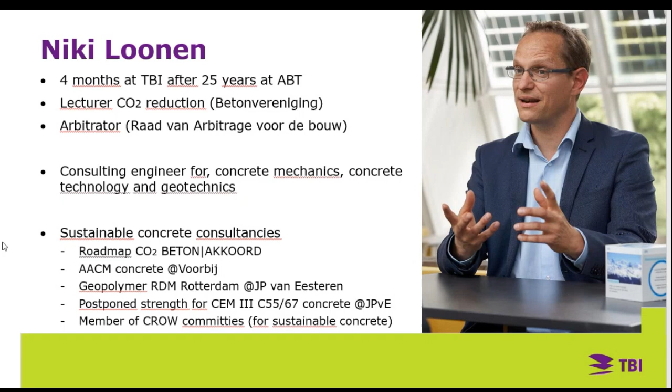My goal is to develop zero impact concrete. I want to use as much secondary materials as possible, and I want carbon emissions to be zero, possibly even negative for concrete. I think that's possible. Last year in December, we made our first cube in the concrete factory in Amsterdam, which was CO2 neutral, with a lot of technology and secondary materials, some of which I'll also discuss in this presentation.

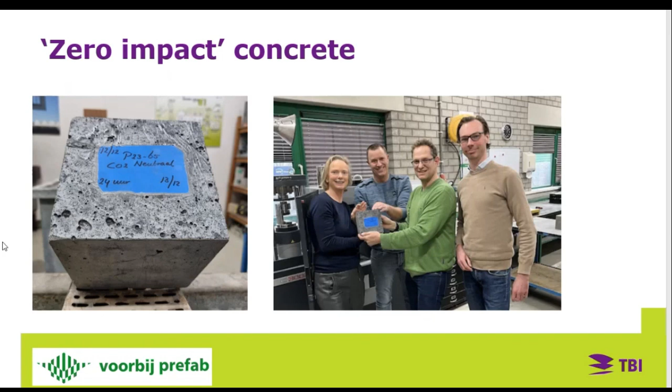The Dutch concrete, how circular is it at the moment? It's not so circular, because most crushed concrete currently ends under roads, pavements, or even warehouse slabs. The problem in the Netherlands is we don't have rock, so we need to find our stone somewhere else, and demolished buildings are obviously a good source. But it's a pity that we put concrete in there, because it's much better used another way. It's more like downcycling at the moment, and we want to recycle the concrete into new concrete. That's one of the goals of the Concrete Accord.

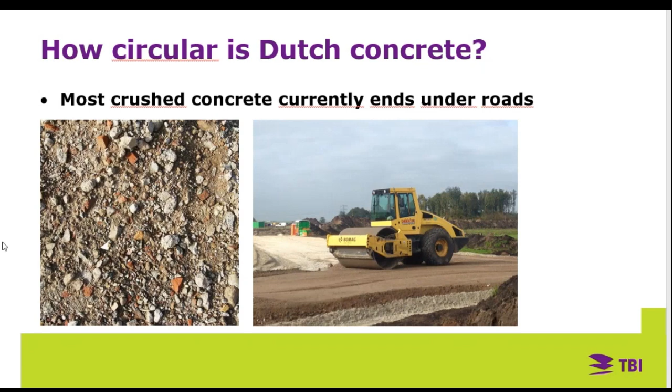This is something we are planning to change. The Dutch highway authorities, for example, are looking into reducing the amount of concrete in blended material, and even going to zero concrete in road foundations in the future. So that's where most of our crushed concrete is going now, and that needs to change, in my opinion.

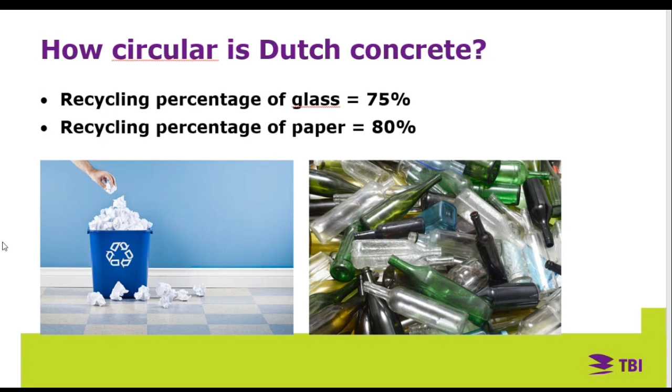For comparison, if we look at glass or paper, the recycling percentages are 75 to 80%. It should be possible to do that for concrete too, because almost all concrete is professionally demolished. It would be even easier to do that when professionals are working on it than when it's only the public sector.

To crunch the numbers: in the Netherlands we use 12.5 million cubic meters of concrete per year. We need 24 megatons of sand and aggregates per year, and we demolish 12 megatons of concrete per year. So potentially we could reach 50%, but currently we are at only 10% recycling of crushed concrete. We need to go from 10% to 100%, and then we could replace 50% of the sand and aggregates that we use. So we have a big step to make still.

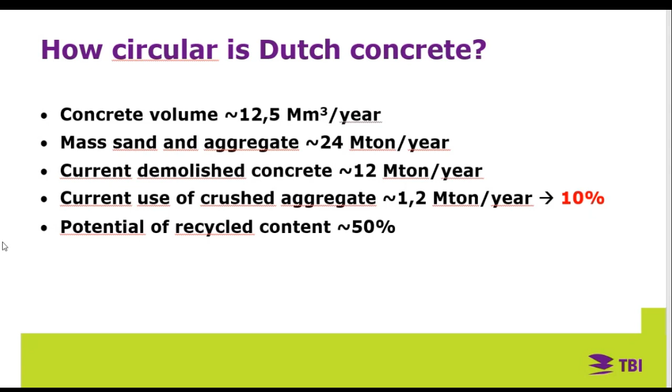What's already happening in Amsterdam? We have a city center, that's A. In B we have the industrial zone with the harbors, and in C we have new developments of housing in the old IJmeer, in het IJ. I will go into that.

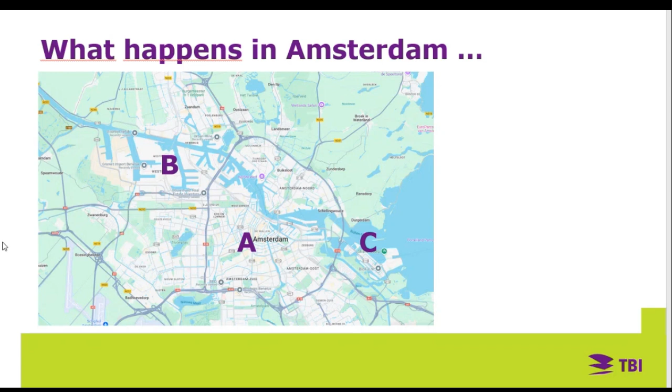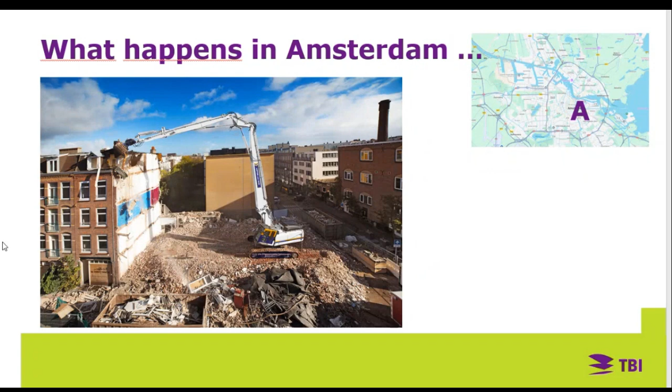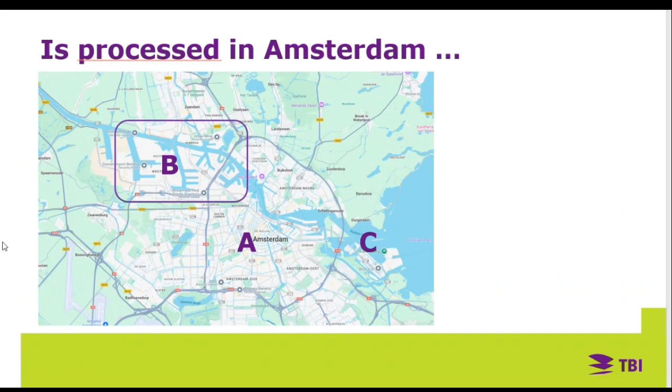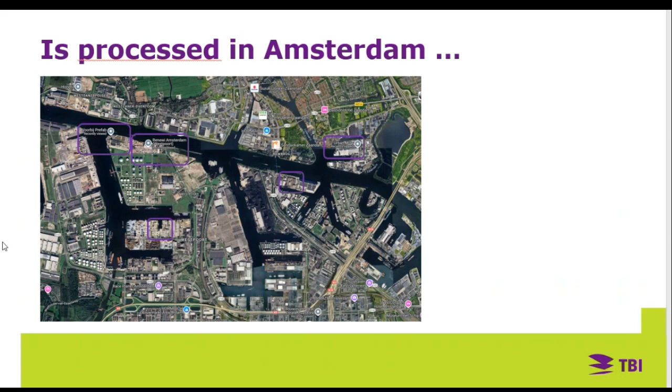We bring it from A to B. So the demolished concrete moves to the industrial zone where the harbors are, and I have some examples of what's happening. The areas with purple squares around them are situations where concrete is reused. For example, in Renewi Amsterdam, you see a big harbor area allocated for the recycling of materials, and on the left you see the device they have to crush and separate the concrete, providing very high quality recycled sand and aggregates that can be used both in precast and ready mix concrete.

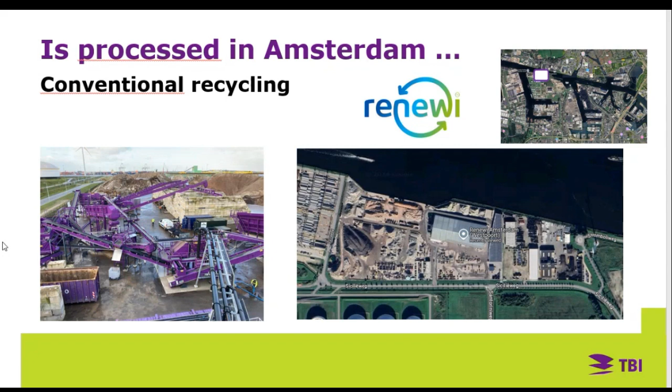For example, very close by, basically neighbors, are the concrete crusher and the company Voorbij Prefab. Voorbij Prefab is using the aggregates, and in the future also the sand, from the crusher in new concrete. So 50% of the aggregate used in the picture on the left is already crushed aggregate, and we are working on replacing 30% of the sand with sand that comes from the same crusher. So it's already happening that the concrete demolished in Amsterdam is processed in a waste plant and used in a concrete plant in Amsterdam.

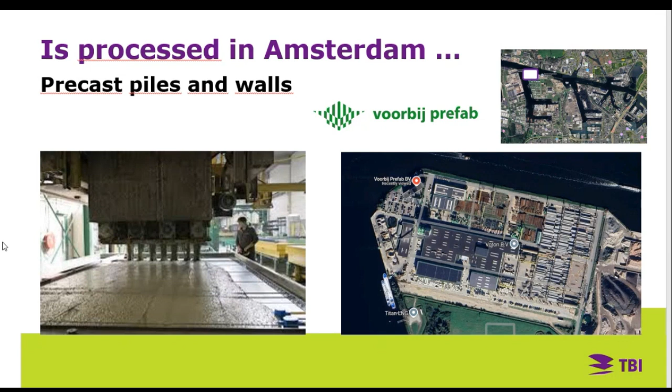Other places where the crushed concrete goes are the ready mix companies in Amsterdam, the ready mix plants, and I show three of them that are also in the same area. So the distances of travel from one place to another are very minimal, which is also a big advantage. If we use sand and aggregates, it sometimes has to travel hundreds of kilometers, but if we use recycled materials, these transport distances are only a few kilometers, so that's a lot less travel.

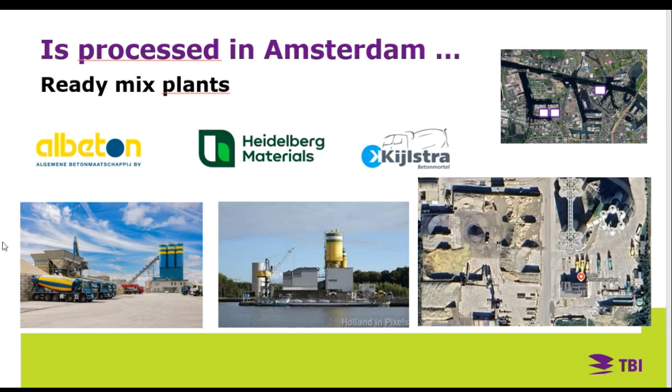A special factory is Rutte Group. It's a little bit outside the industrial area, at the other side of the canal, but still very close to the city. And this is a smart crusher.

On the left picture you see what happens if you normally crush concrete: you get some concrete chunks. Rutte Group has technology, Urban Mine Smart Crusher, and you can see on the right picture that it provides a relatively clean aggregate, a relatively clean sand, and concrete fines.

They do that in their factory, and they don't only collect and recycle the concrete, but they also produce precast concrete and ready mix concrete. But then they still have material left, and they also spread that over other manufacturers in Amsterdam.

This is really interesting technology, because with it you can reuse in new concrete 100% aggregate, 60% sand, and I think 10 or 20% concrete fines as a cement replacement. We will see more of those factories in the Netherlands soon.

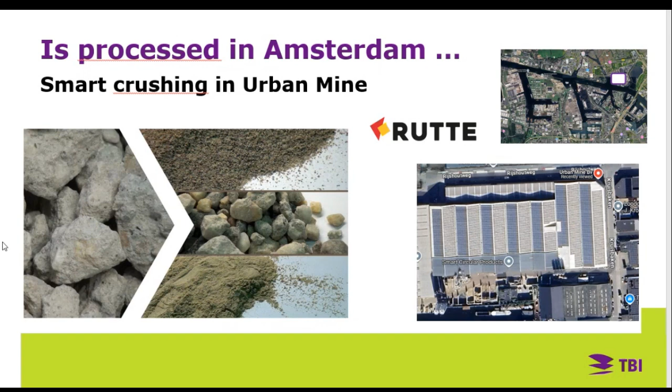One thing that's special when you recycle with a smart crusher is that the concrete fines come back to you, and in this case they are working on technology to bind carbon, so CO2, in the concrete fines. So this is one way that concrete can become a carbon sink, or there's other technology which can be used to recycle the concrete so it will become a binder again.

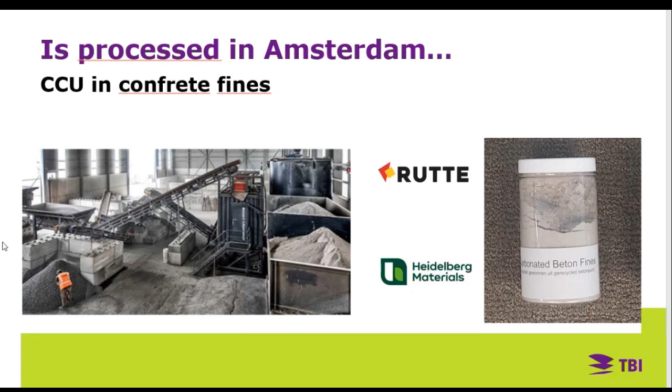Rutte therefore works together with Heidelberg Materials, which is a cement producer. So the recycling of concrete gets better and better with this - it's still not upcycling, but better recycling than traditionally.

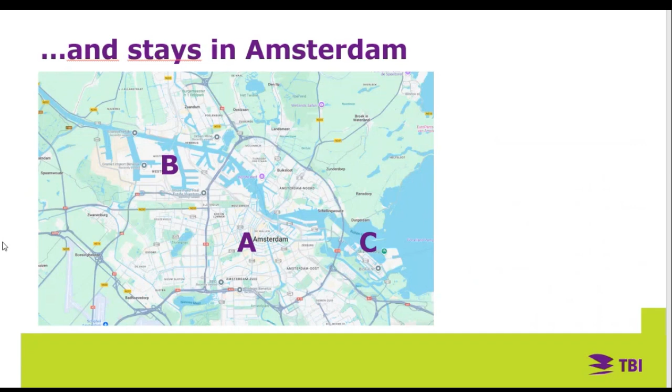So now it's processed in zone B, and what happens then is that the best is to bring it as close by to C.

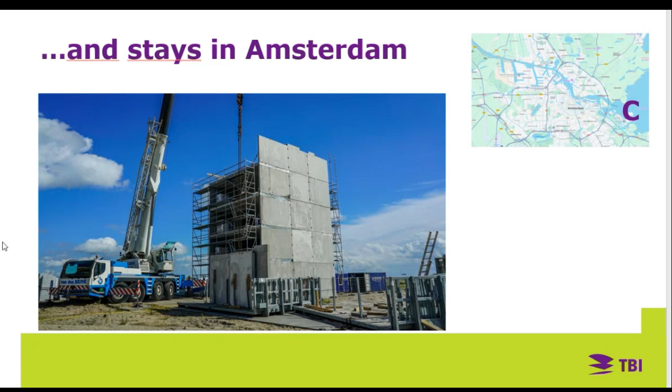A lot of new housing is built in Amsterdam, for example here in IJburg. This is an example of a project in IJburg, which is claimed land from the old sea, now a lake because of the dike in the north. With recycled concrete, we can make very special buildings, like you see here, also located at the port at the west side of IJburg.

It stays in Amsterdam. So the concrete that's demolished in Amsterdam is processed in Amsterdam, and it stays in Amsterdam. And you can make obviously fantastic buildings with it.

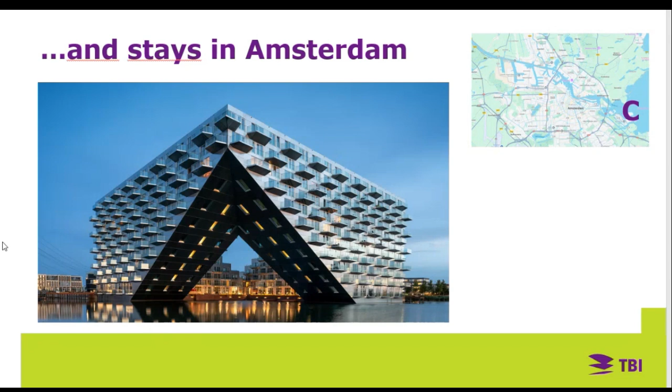So how can we stimulate the reuse of concrete? It's important that separate demolishment will be prescribed in demolishment permits. Currently it's not prescribed, so the demolishment contractor will use the cheapest way of demolishment. The cheapest way of, for example, demolishing a car is throwing it in the river, but we are also not allowed to do that.

So why are we allowed to not separately demolish concrete? That's something that local municipalities can arrange and look after.

There should be more space for storage and processing of demolished concrete, because there's always a lag, and you need stored materials prepared to use it. With normal sand and aggregate that's not so necessary, because you can store it outside the city, or just produce a little bit less or more. But when you use demolished concrete, you have some time between demolishment and using it, and you need time for processing it. So there needs to be more space for the storage and processing of demolished concrete.

There should be a ban on crushed concrete under roads, warehouses and pavements, which we are working on in the Netherlands, but that should maybe also be the municipalities. If they build a road, they should state in their contract that it's not allowed to use crushed concrete, or at least less concrete in these foundation layers, which is possible.

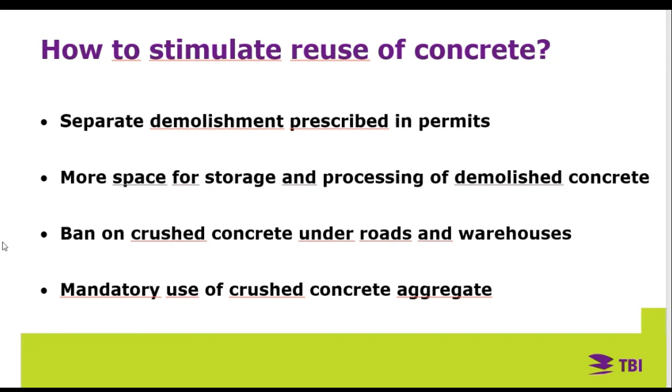Maybe you can stop sharing. I will stop sharing, yes. Peter Paul has a question. Yeah, Peter.

Yeah, thanks for the very interesting presentation.

The discourse at this moment for speeding up housing is to limit the enormous amount of rules, which makes it complicated in many cases to speed up the building of housing. At the end of your presentation, you had 4 recommendations, and 3 are about adding rules: the separate demolishment of materials, the ban of using crushed material below roads, and the mandatory use of secondary concrete. So these are 2 different discourses. Can you say something about it? Because you're working at a construction company, and the discourse is particularly from private parties. They are lobbying the national government to limit the number of rules. But on the same hand, you also hear this loud voice saying, if you want much more circular construction, please come up with some clear rules. Maybe you can react to this.

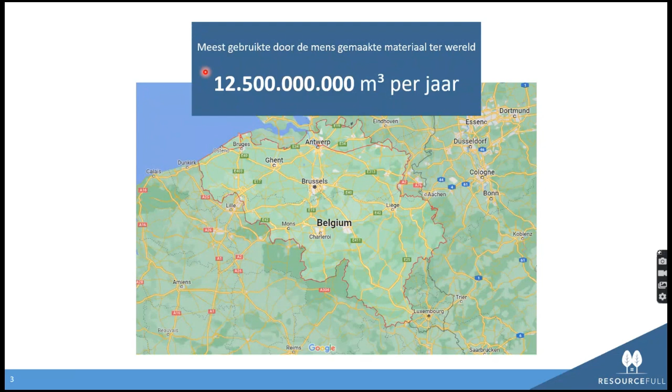Why do we choose building materials to work on? Why is that our mission, to make them green? Well, the whole building operations and building materials together are responsible for 50% of man-made CO2 exhaust. And the mainly used building material is concrete. It's so enormously used, 13 billion cubic meters per year. If you cast that over Belgium, that's a layer of 40 centimeters of concrete every year, again and again.

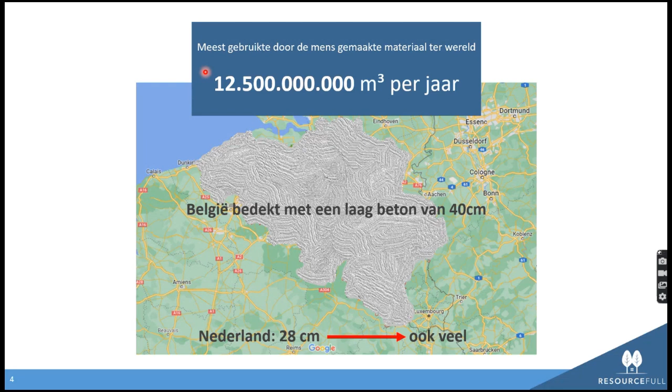I also calculated it for Holland, it's 28 centimeters, still quite a lot. So that's an enormous volume of material that we are using. And that's also immediately the explanation why it has such a high footprint, because ton per ton, concrete is by far one of the best building materials to use, but it's a bit the victim of its own success.

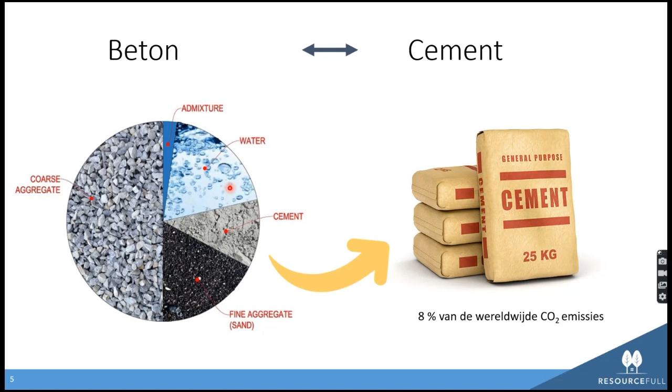Concrete, we make it by mixing cement and water, gluing together the sand and the stones, and this 15% weight of cement is responsible for plus minus 90% of the footprint of unreinforced concrete. And the cement has a high footprint.

Maybe you know some of this already, because we start with limestone, calcium carbonate, a calcium and a carbonate molecule bounded together. We put that in a big furnace together with some car tires and coal and whatever to produce clinker, the active mineral in the cement. And like that, we produce 900 kilos of CO2 per ton of clinker.

Is that a lot? In fact, no. If you make steel, it's more like 2.5 tons of CO2 per ton of steel, and primary aluminium, for example, can be up to 15. So ton per ton, cement is already on the low side.

And then we don't even talk about concrete, where we use so little cement per cubic meter. But because of the production volume of 4 billion tons per year, rising towards 5 or 6 billion tons per year by 2050, the material is responsible for 8 to 10% of worldwide CO2 emissions. To give you an idea, that's about 4 times more than all the airplanes in the whole world the whole year. If cement would be a country, it would be ranked after United States, China - cement, then Japan, something like that. Cement only is really a very high emitter.

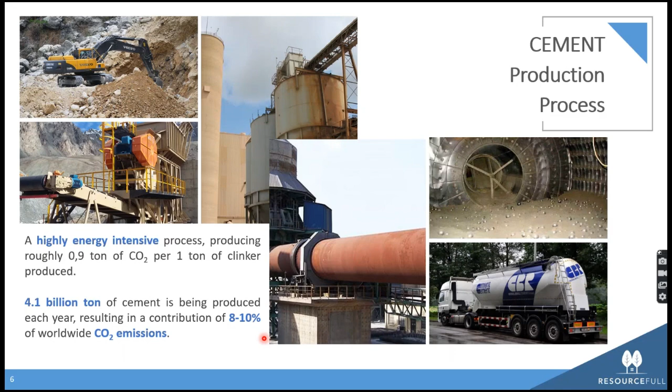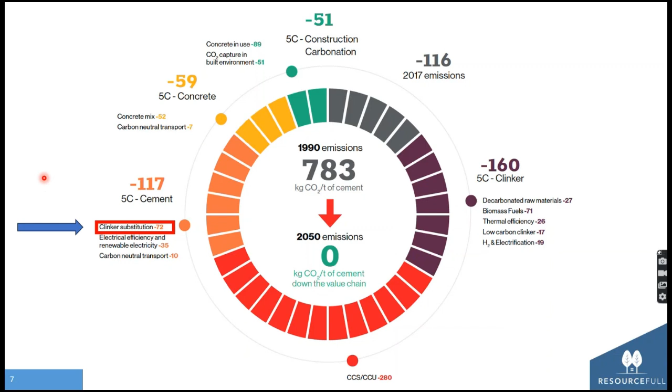So what are we doing here in our company? We try to substitute clinker as much as possible, to the largest possible extent. With which materials are we trying to do that?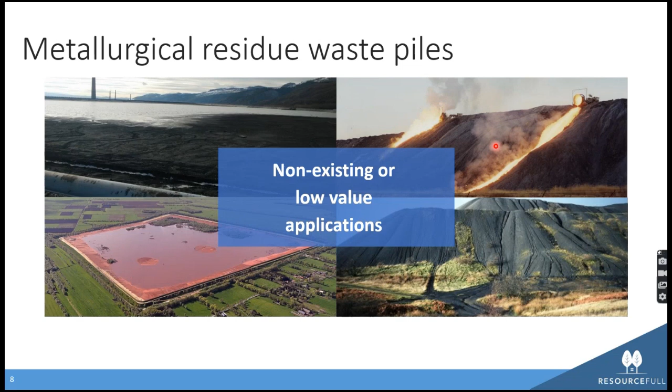We are doing it with calcined clays and these kinds of virgin raw materials, but also a lot with waste materials from other huge industries like the metallurgical industry, the ones who make steel, lead, zinc, copper, and all that kind of minerals. They are having a waste problem, like you see here in Hungary with red mud, and here mountains of slag.

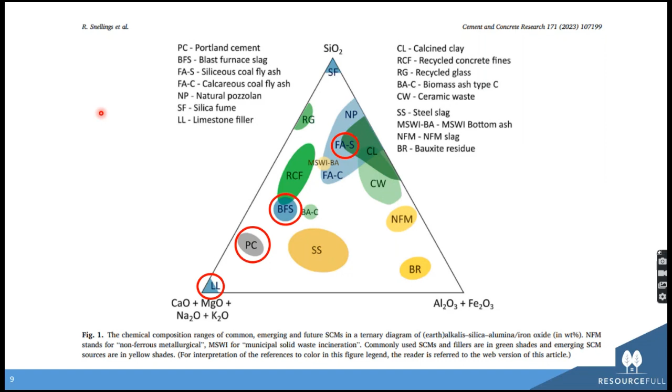But next to that, there are still a lot of other materials that can be used to substitute clinker cement, in a small way 10-20%, up to fully clinker-free cements. It's not me who is saying that - there are smart professors writing papers about billions of tons of materials available in the world to do this. It will never be the perfect solution, and we will always need Portland cement, but the more we can avoid it, the less CO2 we need to capture afterwards, and the cheaper the building materials will be in the future. Here you see that fancy graph from a paper.

Our specialty, I'm a metallurgical engineer by background, is slags, metallurgical waste. Why is that? It's a little bit historical and local reasons. We have 3 steel plants here at the sea, 2 of ArcelorMittal, 1 of Tata Steel in IJmuiden. In the Campine region, the Kempen, Antwerp region harbor, we have a lot of non-ferrous metallurgy - lead, copper, aluminium, zinc. And in Wallonia, we have a lot of stainless steel and steel.

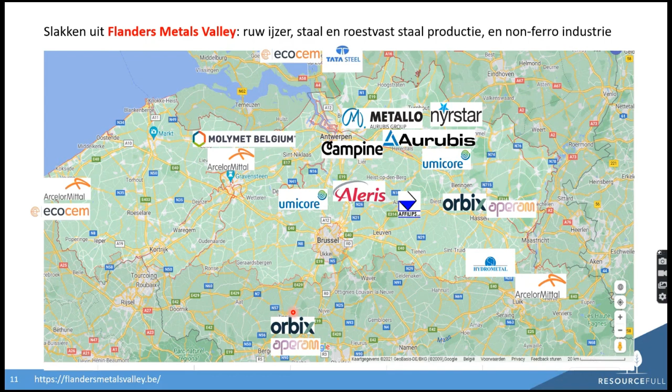So locally, if you add up all these slags, we come up with a number of 6 million tons of slag available in Belgium, on a Benelux cement market of 11 million tons. Globally that ratio is a bit different, but here locally in Benelux, we have a lot of these raw materials available to more or less replace cement, which could really be - in Dutch we say - a slok op de borrel.

What is slag? Where does it come from? Very shortly explained: when you take a mineral, an ore, from a mountain, you bring it to Belgium, you mill it, you put it in a furnace. In an average copper ore, for example, already refined, there is 20 to 30% copper, which means you still have 70 to 80% other materials, stones, sand, which also melt in your furnace. That floats on top of your metal, a bit like oil floats on water.

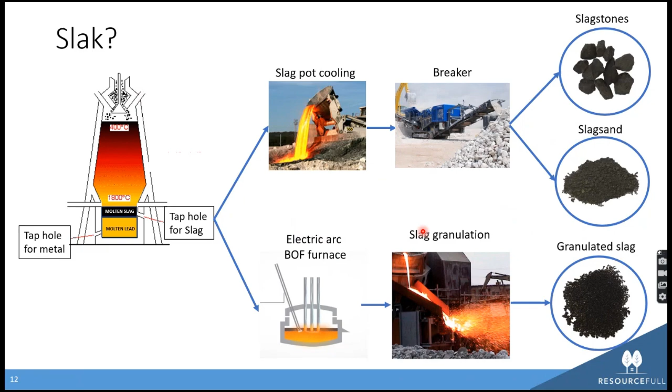And what do you have to think about slag? Slag is like magma, like lava coming from a volcano, which now we just throw on a mountain, but if you treat it right, you can make it into a reactive mineral.

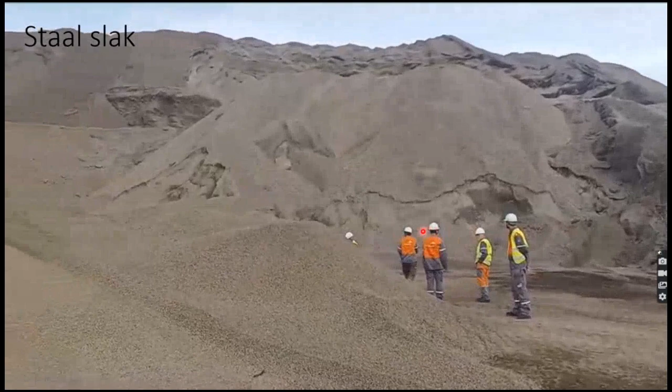Is there enough slag? This, for example, is a movie from ArcelorMittal in Ghent, where every year they fly a drone over the mountain of steel slag to see how much they collected. Currently they have a stock of 3 million tons of steel slags, for example. So we are actively trying to recycle that from waste into high added value building materials - from slag to stair. That's a little bit the mission.

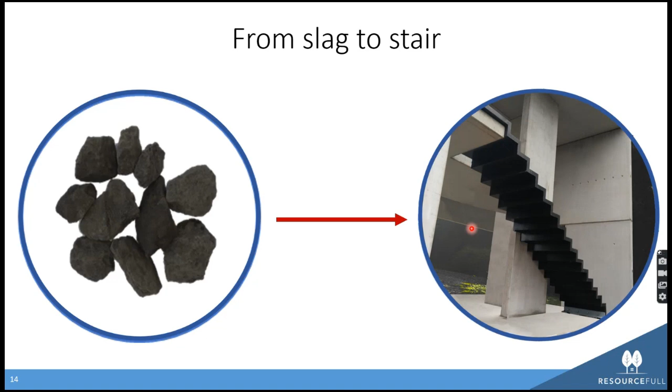We do that through our 5 departments: to mill the slag, to analyze what is inside, can we remelt it? Then we try to design a new cement with it. If we have a new cement developed by geopolymerization, by CO2 carbonation, and so forth, we try to design products with it - concretes, 3D printing, mortars, and so forth.

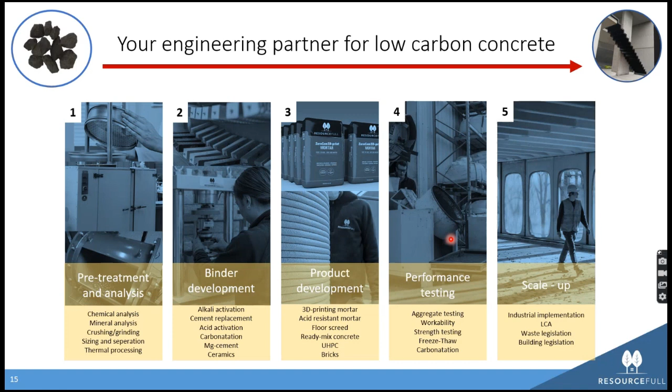Then we look at the long-term performance of concrete, because the new concrete we design should last at least as long as the current concrete. Otherwise, it's a stupid invention. And then we like to implement it at real scale.

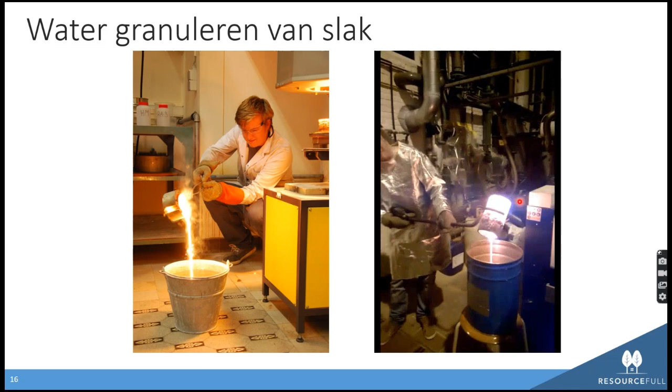So here you see, for example, how do we start? We try to teach these guys: treat your slag like a product, change it upstream, change the chemistry, change the cooling rate. Then we try to do that at a larger scale, where we then make pilot batches of these materials.

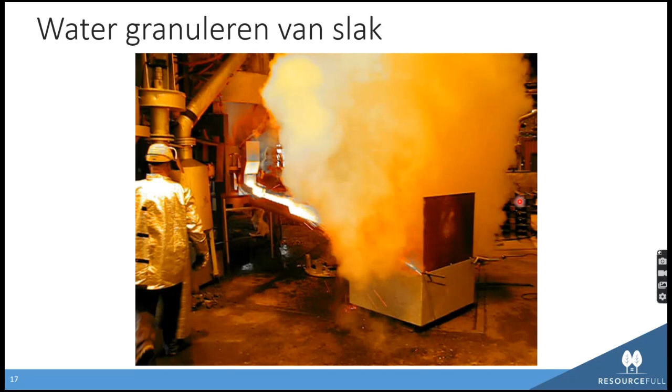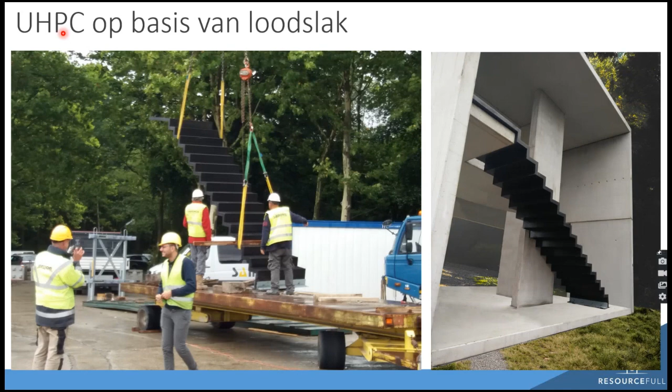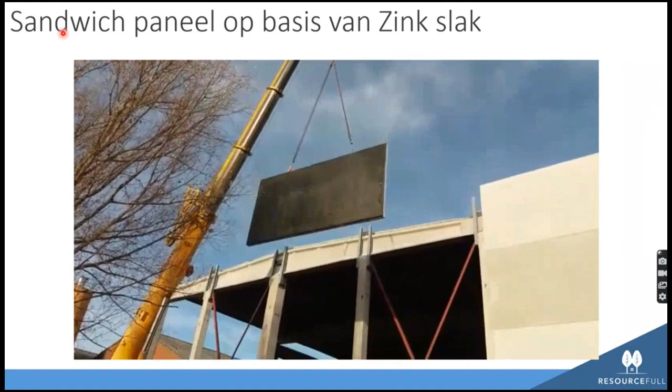And here you see, after the whole lab development, some pictures of what we have implemented. For example, ultra high performance concrete without Portland cement, purely based on lead slag and blast furnace slag, activated with potassium silicate. The same kind of binder was then used in the design of a C90-105 concrete, basalt fiber reinforced, for these big concrete sandwich panels to be installed in industrial buildings. And here you see, because it was a fiber reinforced strong mix, we could even reduce the outer layer to 2 centimeters rather than 6.

So we could also store more of these panels in a truck, also lowering transport cost.

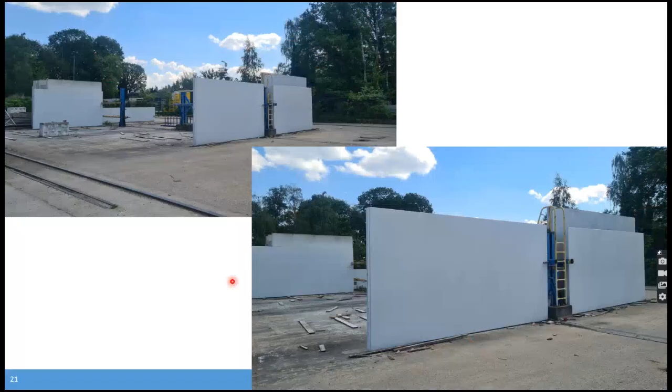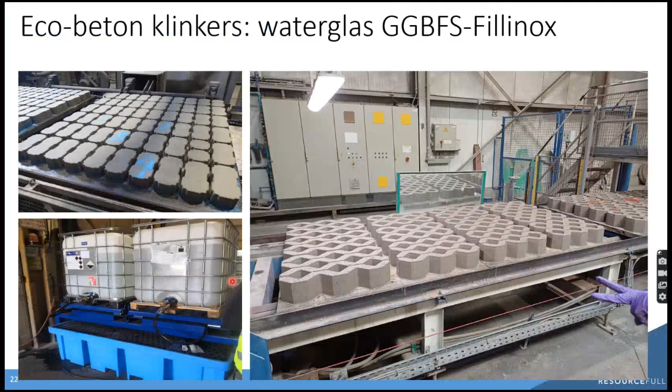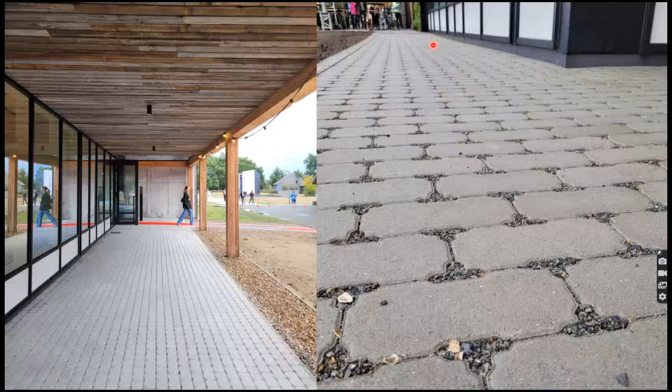We did the same with blast furnace slag, where we are now putting a whole fire truck building with these kind of materials. We are making clinkers and pavers and grass tiles with it, with a more classic geopolymer system. If you mix the slag with water, nothing happens. You need to bombard it a little bit with stronger chemicals to make it react. Here you see it was a mix of stainless steel slag and blast furnace slag, where we put 1,000 square meters of these pavers in a new building.

We are making sewage pipes with a combination of slag and fly ash. Here we in fact have a double win. We get out all the Portland cement, so cube per cube we have a lower footprint, but the geopolymer is also more acid resistant against the biogenic acid attack in the sewage pipes. So we also have a double lifetime, which is we kill 2 flies in one slap, or however you say it in English.

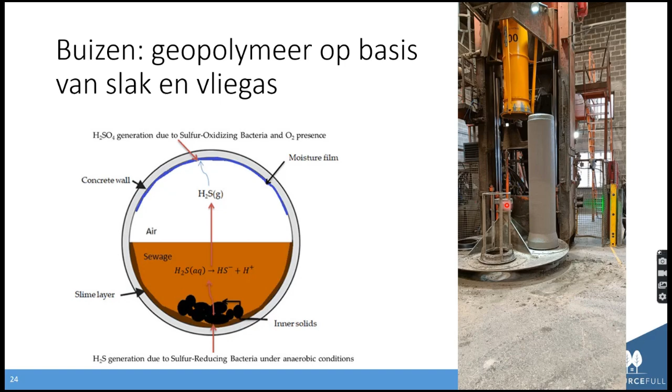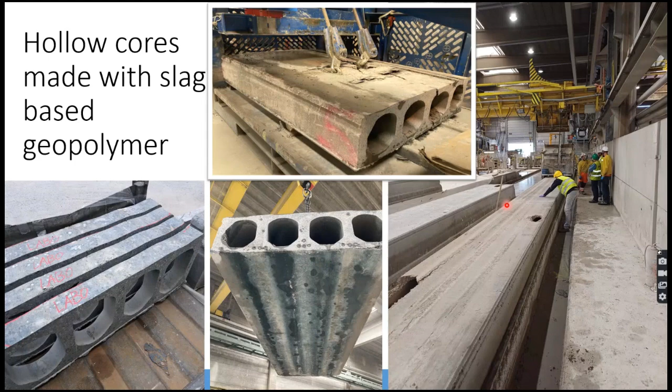We make hollow cores. This is a little bit more advanced pre-stressed concrete. Here we are doing the pilot trials, but this requires longer time towards implementation with these new kind of binders, because we have to study creep and creep relaxation, shrinkage, corrosion resistance of the cables. But of course you have to start the investigation now. By the time we can implement it, you start now to maybe implement it in 3 to 5 years.

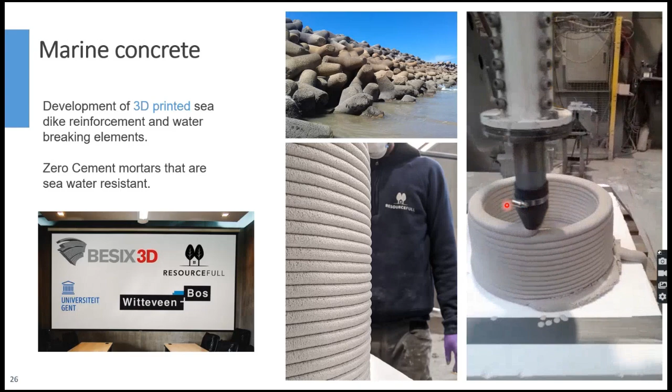3D print mortars is also a little bit of a hype in some materials and some products. I think we believe in it, but if you 3D print, you should do it with an eco mortar, because in the average 3D printing mortar there is 600, 700, 800 kilo of Portland cement. Then the people who claim they can use a little bit less material, yeah, but in an average ready-mix concrete there is maybe 300 kilo of clinker. Then you already need to use a lot less material to be more eco-friendly.

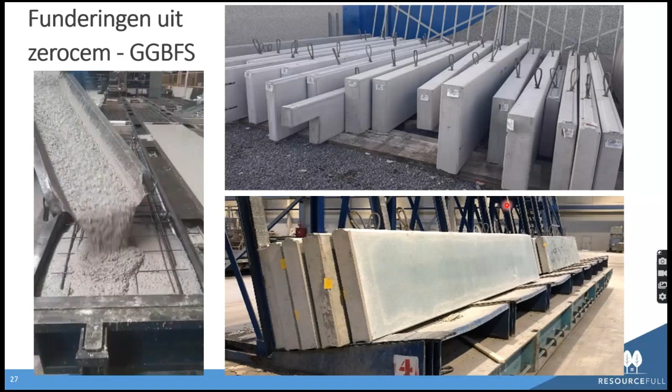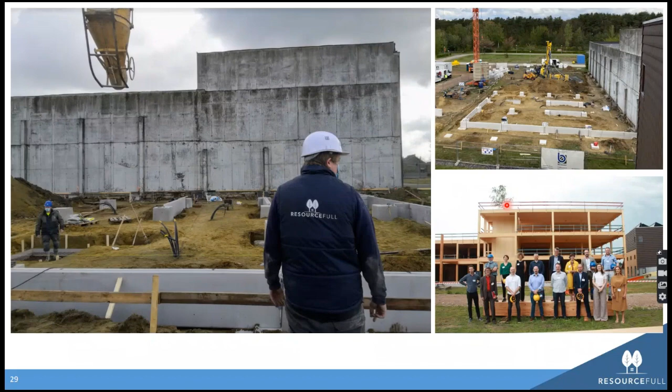This was then further fine-tuned into a self-compacting geopolymer, add water only, where we produced I think 120 cubic meters of blast furnace slag activated material, which we put as the foundations in a new building, and we are now monitoring the quality over time. Here was the first time ever we really built something structural.

This was this hybrid concrete, something Niki also implemented in TBI, I believe in Voorbij Prefab, at the time he was working in ABT, a very similar mix, where we can reduce the amount of clinker to a very low amount, but still have a demolding time of 16 hours, 20 hours, okay to turn in prefab companies.

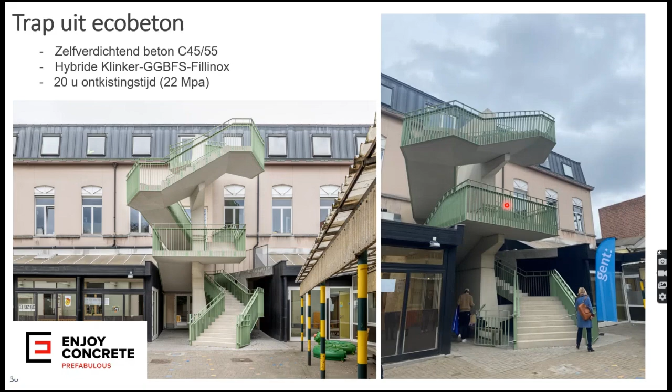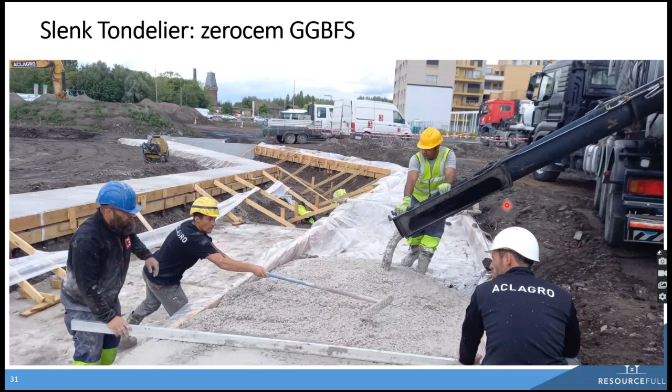We put some footpaths in Ghent, where we made a clinker-free geopolymer, but 50% of the sand and 100% of the gravel was replaced with recycled concrete sand and recycled concrete stones. Also what Niki showed before, and he is right, when you use recycled concrete stones it doesn't change the MKI score of your concrete. But if you can combine it with a geopolymer, maybe we have a bit even the best of both worlds. And here is my wife inspecting the concrete quality. She was not as impressed as I hoped.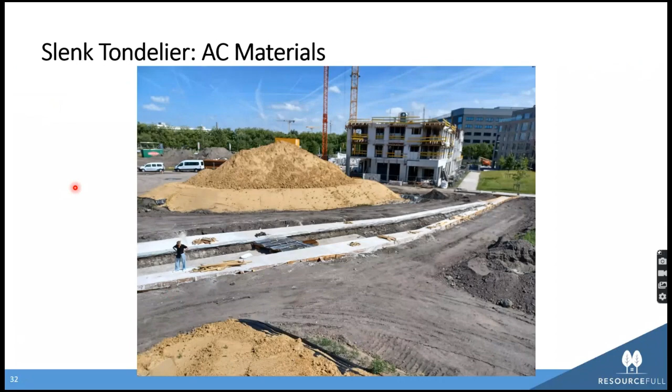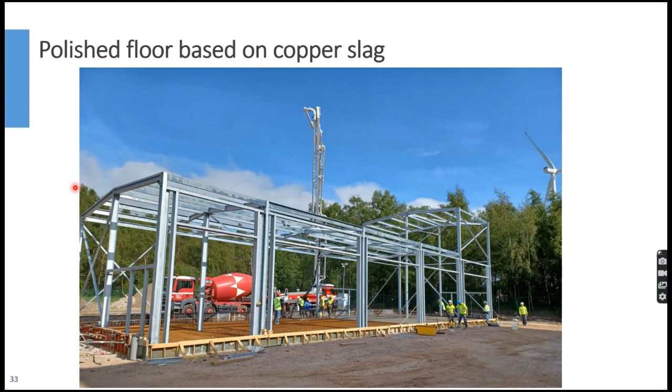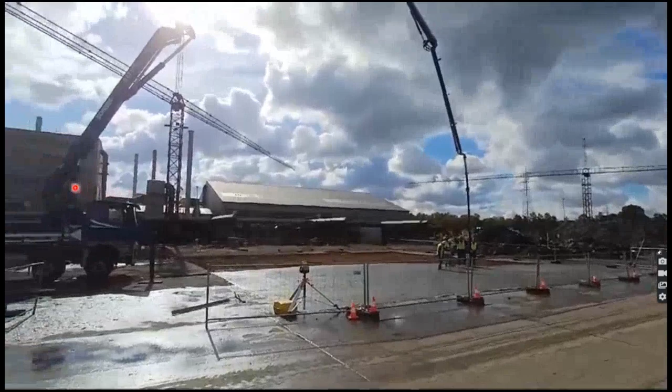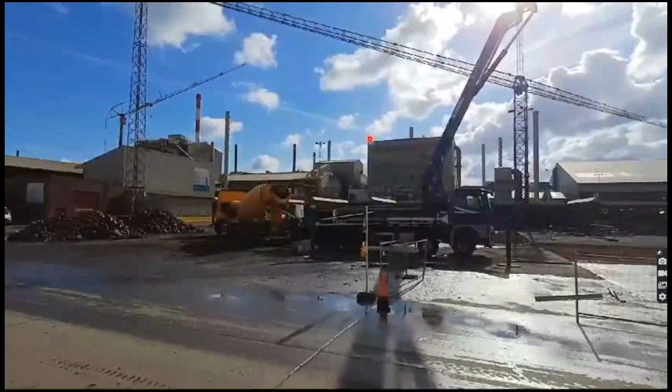Then with copper slag, this is, for example, a material that is currently still dumped somewhere. Aurubis, who has a big plant in Beerse, asked us, we are building a new warehouse, we want all the concrete to be made with our own slag. We walk the talk, let's do it. And we designed for them a beautiful pumped concrete based on copper slag, which was polishable after a few hours on a windy April day. And it still looks good, up to date. They liked it so much that we could even go up higher, one environmental class. And now we put 2,000 square meters of copper slag based concrete in the outside space, the scrap yard of Aurubis. This place is the big copper furnace where the slag comes out. At the same part, we show that with the waste, we can do something beautiful.

Brick slips, baked clay, also has a very high footprint, although it's not known for that, but it has a higher footprint than concrete, for example. And this is, for example, something that can be implemented quite fast because it's not structural, not reinforced, and so forth.

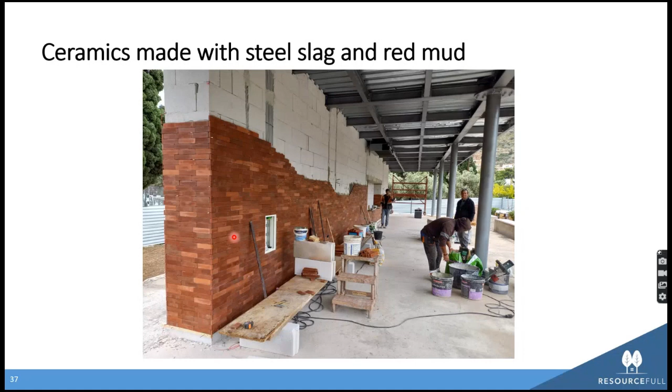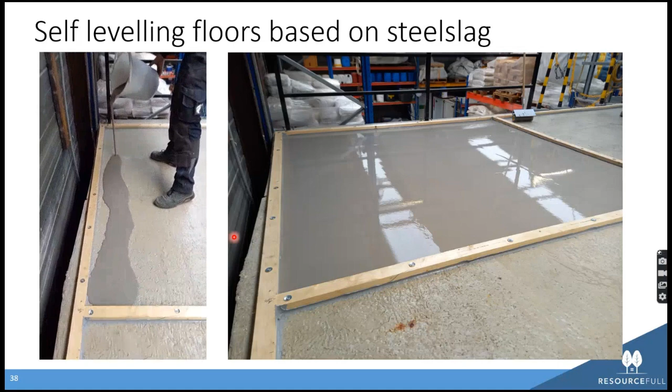Self-leveling floors, a little bit the same decorative layers, but we get out all the Portland cement and we do it purely based on steel slag.

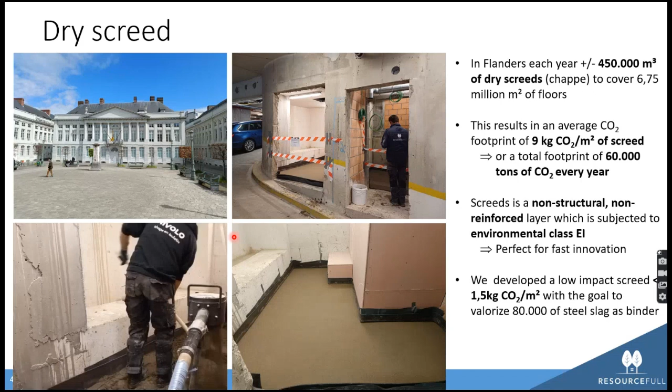Then it has some other requirements. As a last example, we're also working on a dry, non-structural, non-reinforced layer, smeervloeren, dry screeds, without clinker. In the average cubic meter of dry screed, there is more clinker than in ready-mix concrete, which in my opinion is totally stupid. So if we cannot innovate in these products fast enough to lower the footprint of the building industry, it will not work in any kind of product. So this was a gallop tempo introduction to

new kinds of cements, in addition to what Niki already told us before. Thank you very much, Lukas. This really shows it's more than just the aggregate and the cement, which obviously, because of so much volume, we always think about. But the cement and the changes in our area, I think the chances are quite high to do something. Are there some questions?

If not, I might have a question myself. I understood earlier, with steel and so on, it's obviously something we read every day in the newspaper. Two things: the CO2 emission, and that there will be more and more hydrogen used for steel production. And I understood that then you will have no slag, or other kinds of slag. So this is one thing I would like to know. Also, we are now thinking that many of these companies will close, so what would be the effect on that?

I will, I think I have a slide on that. Yeah, here I have it. I will explain.

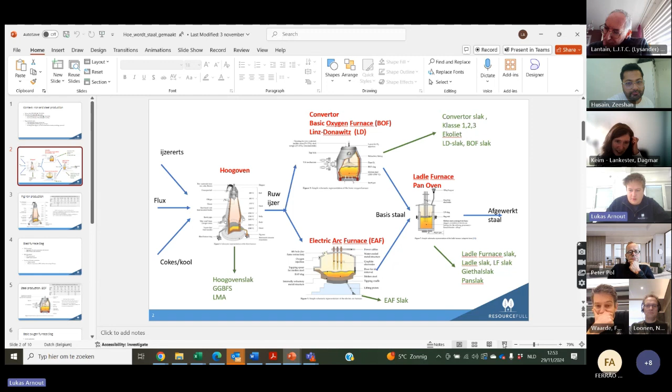This is how currently in IJmuiden, in Ghent, and in Duinkerke, the three closest steel factories, how they make steel. You start with a blast furnace, the hoogoven, where you throw in your iron ore, your flux, and your coal. Here, the transition from iron ore to liquid iron is happening, and 90% of the CO2 emitted during steel production happens in this furnace. This is the furnace that locally, by '28 and '29, the factories ArcelorMittal and Tata will start breaking down. In Ghent, for example, they have two of these furnaces and they are responsible for 6% of the total Belgian CO2 exhaust, so these are the ones they are breaking down.

Then you refine it further and even further to make steel. These furnaces will always keep on existing — that's the slags that we are working hard to recycle. Here, this is a problem: the blast furnace slag coming from this one is currently super widely used in the Benelux. That's why we have the lowest concrete footprint of the whole world, but locally the availability of this material will be gone. So that is a challenge.

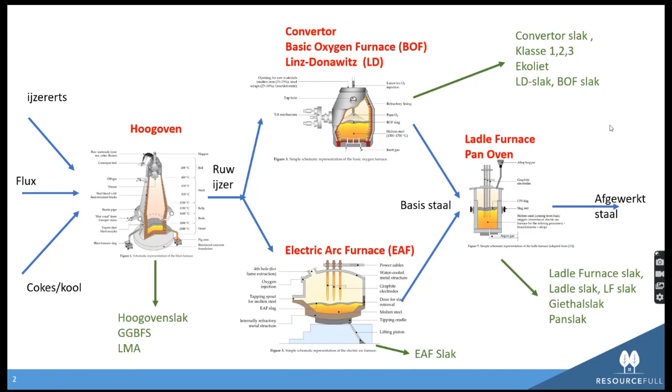But they will replace these kinds of furnaces with other furnaces. So we're already working with the steel companies to see what kind of slag will come out of the new hydrogen furnace that will replace this one, to make it suitable for cement. We are working hard on recycling the EAF, converter, and ladle furnace slags to compensate. This is a little bit the story, and indeed, that story is only valid if they still exist in a few years, and we don't let them get killed by cheap Chinese steel. That's for sure true.

Thank you, Lukas. I also had a question on stability of the materials, but also on their acceptability — how is it going, and do you think it will be easier to commercialize them, or is that an issue?

No, I believe it will work because at a certain point they will be cheaper than normal cement, and they are one of the easiest ways to already lower the footprint of concrete. There are two things: you have the environmental point, so first thing we do is check what is inside — are there heavy metals, is this a material that is safe to use? Or, by using it in concrete, can we immobilize these metals so that it becomes safer than just dumping them?

But this is the law — if you are above the leaching limits, you can go to jail for it, so that's obliged, that's the first thing we look at. Then you have the more voluntary rules, like the Benor, Komo kind of rules on concrete. That's why I showed we are working on pre-stressed structural concrete, which will take a very long time. We are in the Belgium Norm Commission to write new norms on new cements and so on.

But that's why we're also working on dry screeds and pavers and stuff like that, lower liability products where we can accelerate innovation much faster. That's a little bit my answer to that.